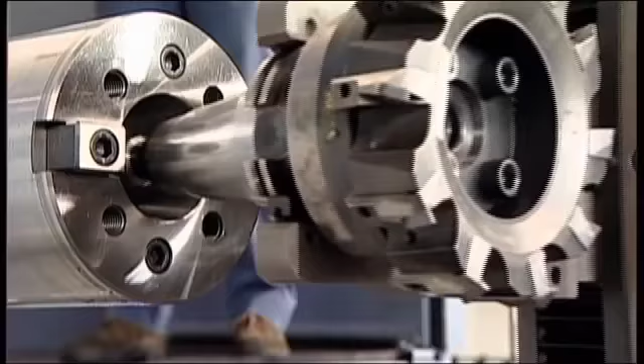In your manufacturing operation, you never rest, and neither does the competition. Your profitability is due in large part to the smart investments you make in converting raw material to finished product as efficiently as possible. And to do that, the machines you use must offer flexibility, creativity, and innovation.

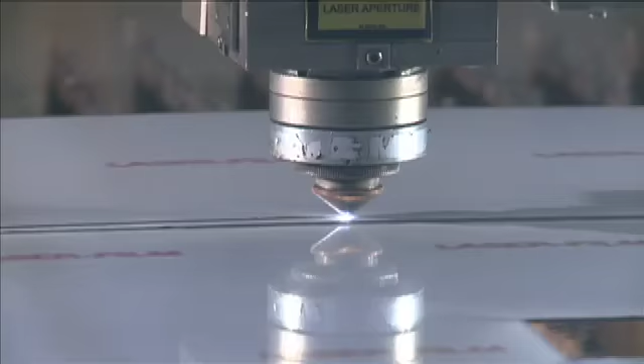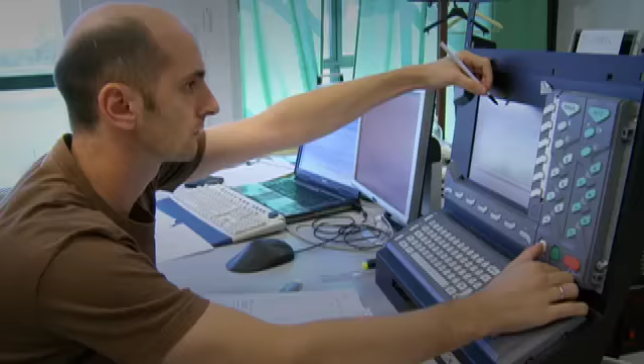Machines Italia is a project by the Italian Trade Commission that runs in collaboration with Federmacchine, which represents 14 industrial machinery manufacturers associations. Alfredo Mariotti, Secretary General of the organization, explains.

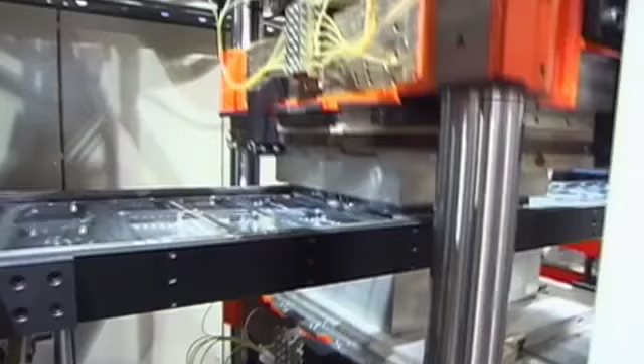Federmacchine is the umbrella organization for associations comprised of Italian companies that manufacture machinery - in other words, production machines used in various sectors of industry. Federmacchine, in addition to providing marketing and exporting assistance for their members, works in collaboration with the Italian Trade Commission to bring the best of Italian technology to machinery and technology expositions throughout the world.

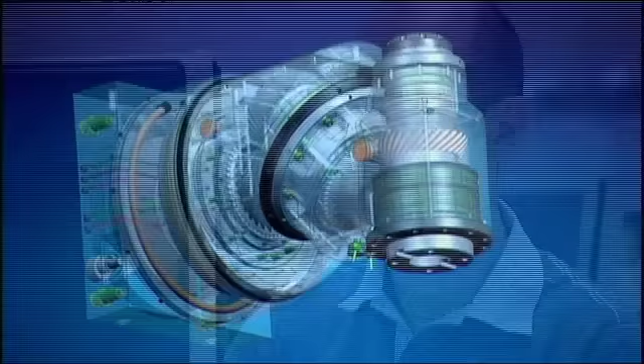We often say it is a machine or instrument that develops and that makes explicit human thought. And not just the expression of thought, but heart, soul, and beauty made manifest.

From the towering Air Force Memorial in Washington, D.C., to the architecture of Frank Gehry, Mariani Metal has found a niche in creating the impossible.

If an architect has a plan and they're unsure about it, if they take it to Mariani Metal, we can make it into a reality. And that's basically our philosophy, whether it be for an architectural job or something in terms of a structural nature for a building. We like to think that our range is very broad and there's no job that we can't take on.

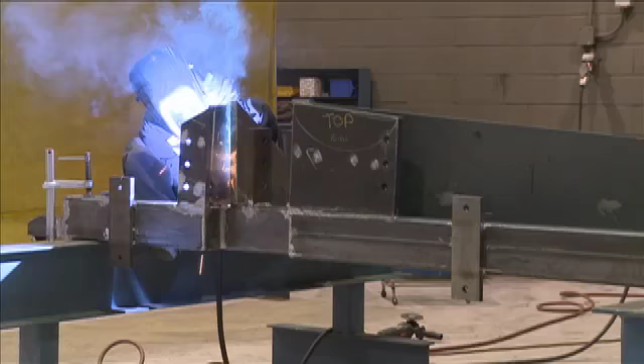When you are running a business, particularly in our business with construction where delays are very costly, your machinery has to work. And if you buy a machine that's of a lesser value, a cheaper grade in terms of quality, you're going to try to use the machine and the machine won't work, and that's going to cost you money and your customer money. So the Italian machinery, their benefit is that they work every time.

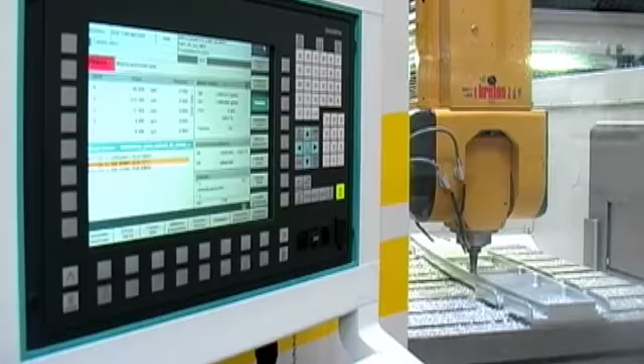The expression of one's craft is often external, but not always. For an automotive part maker, it's the innovation inside that counts.

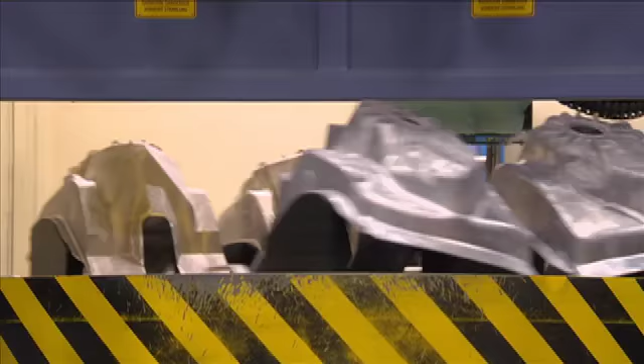Albany Chicago Company specializes in producing high-pressure aluminum die castings to very close tolerances. After winning a large contract with an automotive manufacturer, Albany Chicago had to find innovative solutions to meet their new clients' demands. We searched a wide spectrum of options to meet the needs for this particular automotive application, the shock towers. And there were not many companies that offered both an X-ray machine and an X-ray machine that had ADR.

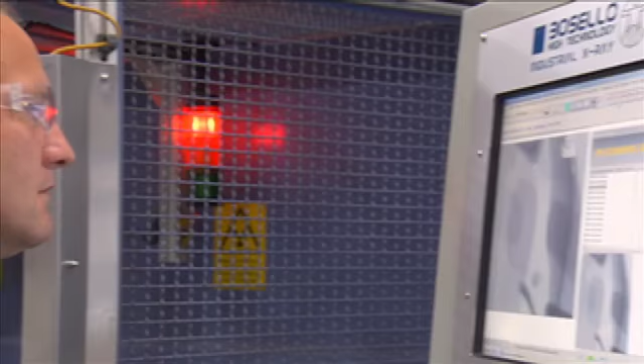ADR is automatic defect recognition, and we thought it was essential to have that ability. The Italian company, hands down, had the answer that fit this requirement. Bosello High Technology had what they needed.

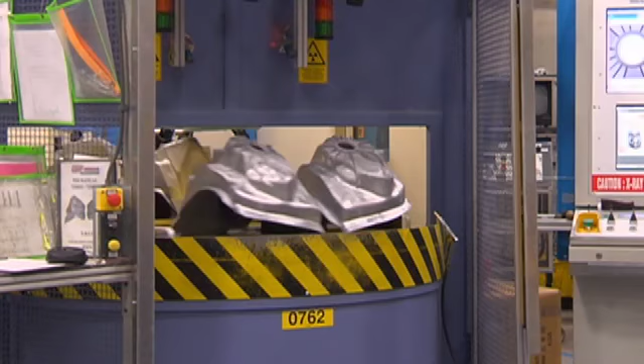As an Italian company that specializes in X-ray equipment, Bosello provided an industrial imaging unit with automatic defect detection, a faster process that reduces errors by automating a task that was previously done through manual interpretation.

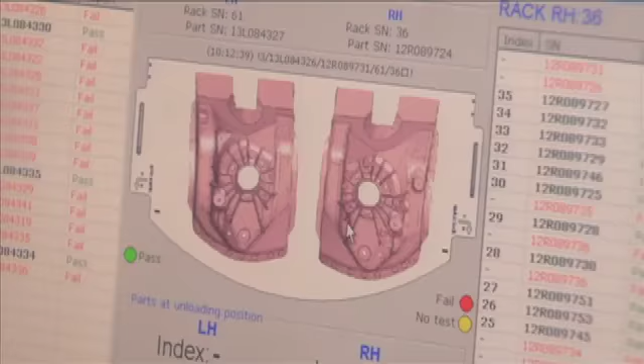The nice thing about the Bosello equipment, it doesn't reason. It's equipment. It doesn't care whether it's 5 minutes into the shift or 5 minutes towards the end of the shift. It's still going to mathematically evaluate potential defects against set criteria.

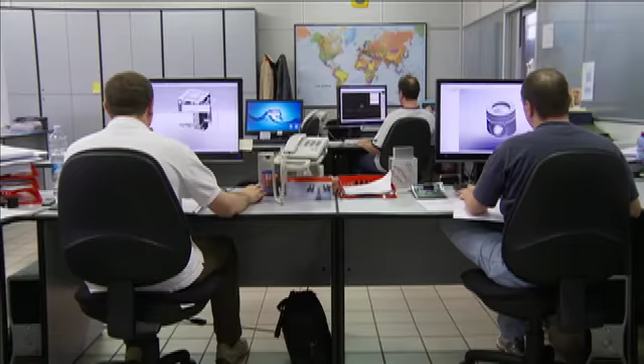When you have a passion in the company, every single simple machine is as important as a very big project you are developing. So I really need to know that customers are happy.

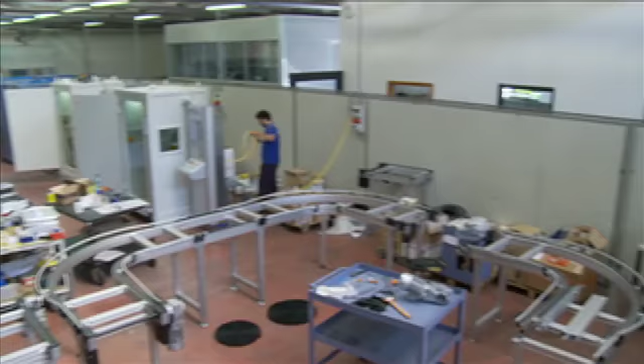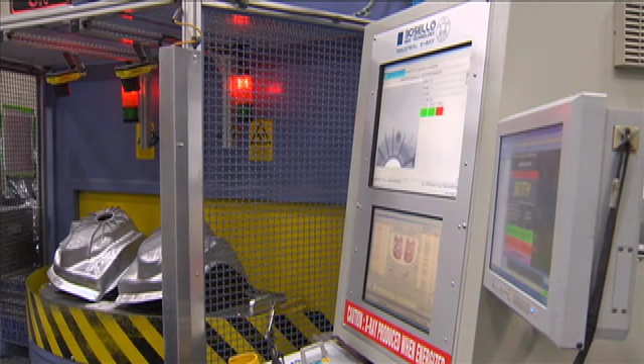I had preliminary conversations with Bosello, and in fact was very impressed with their understanding of what our needs were and how quickly they were able to address those needs and concerns. They're readily accessible on the telephone, via email, and physical presence in the United States.

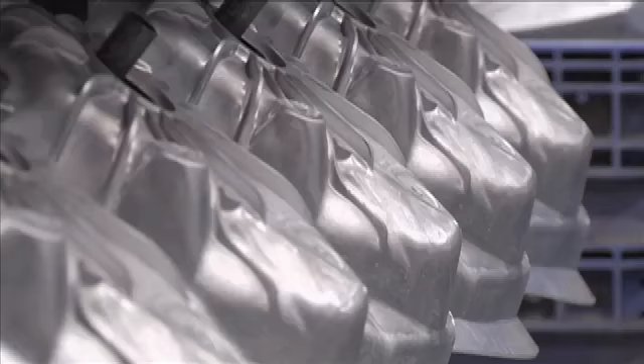They were very responsive. You know, the fact, hey, this is startup, they knew we were, shall we say, under the gun to make parts for our new customer. So they understood the urgency of that situation and were monitoring the situation very carefully.

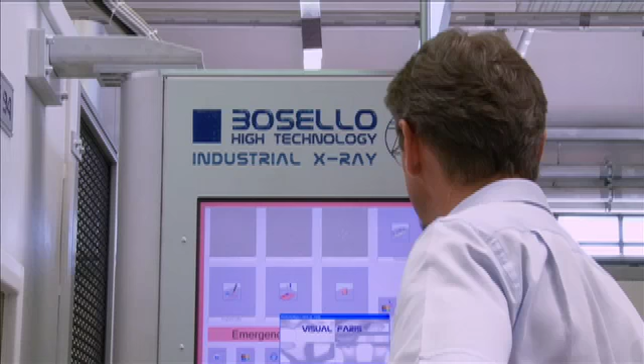Become a high volume company is not my goal. I'd like to be a very like an artisan, but with high technology.

The artisan can work in many media, applying high technology to industrial imaging or mechanized muscle to beautiful wood fabrication.

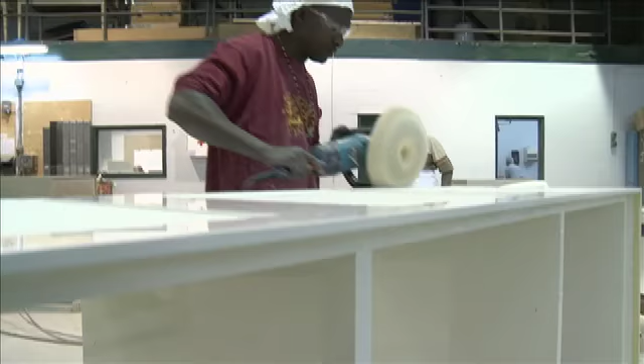Pinehurst was founded in 1967 by Bill Christie and Jim Christie, my father and my uncle. They began working in my dad's basement, and today we've grown to 150,000 square feet.

As one of the largest custom fabrication facilities in North America, Pinehurst Woodworking Company builds store fixtures and supplies shop fitting services to luxury retail.

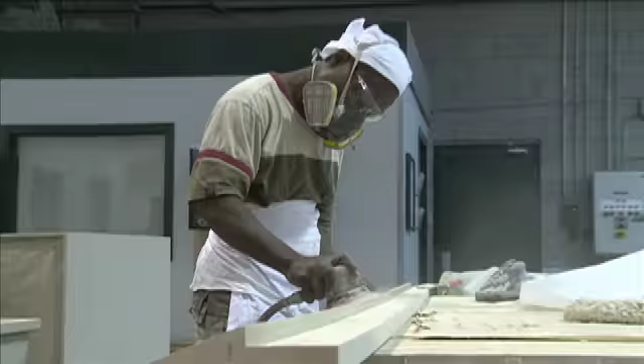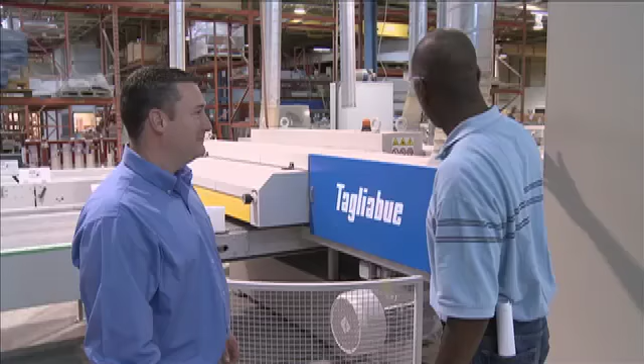Pinehurst prides itself in investing in equipment and technology to ensure there is no creative challenge that will exceed their manufacturing abilities. We look to Tagliabue to help us with setting up a finishing line, a sander, and a polishing system in order to be able to produce high-gloss finishes.

As family-owned companies, Pinehurst and Tagliabue share similar values.

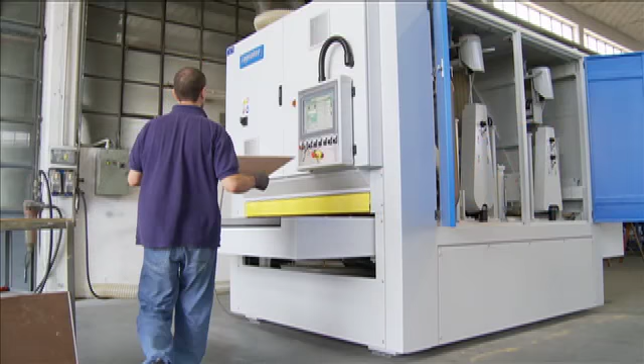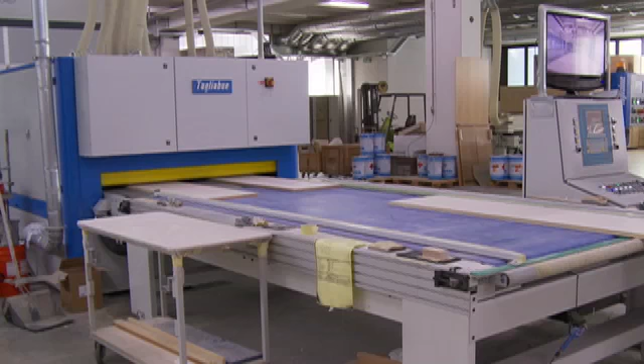For Tagliabue, their family name is on every machine. With that comes pride and the responsibility of making sure their products are always of the highest quality. Since we provide tailor-made machines for our customers, our project teams design a solution based on specific needs on a per-customer basis. We are responsible for the whole process from the beginning to the final product.

The key thing when we're looking for new equipment is really the ability of the salespeople of the company to be able to get involved in our process and really understand what it is that we're trying to accomplish. To come to our facility and understand how it is that we process things in order to make their machines work for us. I think it is in our DNA to be so much flexible and to satisfy our customers' requests.

We had the benefit of being introduced to Michael from Tagliabue. He actually came to our facility and he was kind enough to review our process and actually explained what we were doing and how we could improve it. It's known that the Italian machine producers, not only in the woodworking industry but also other industries, apply their machines very flexibly, very creatively and innovatively to the needs of the customer.

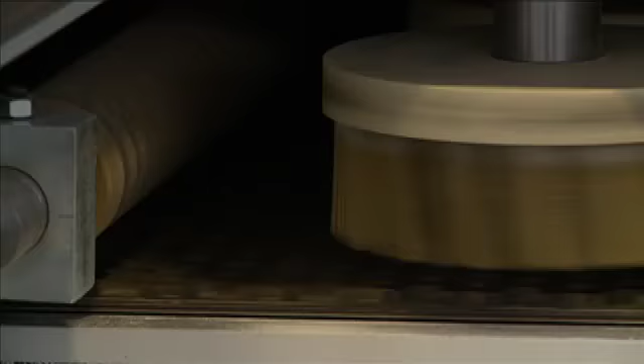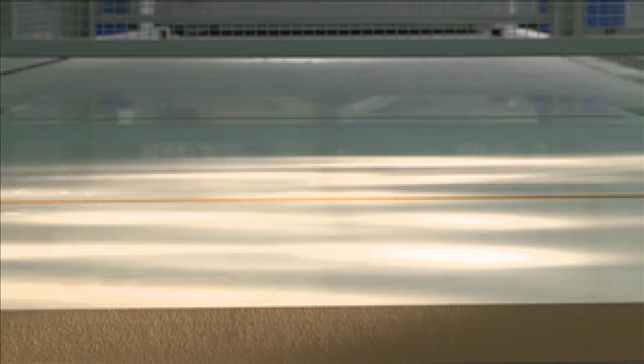The Italian machinery is really on the leading edge of millwork machinery. The finishing line, the sanding machine and the buffing machine have really dramatically increased our bottom line by reducing the amount of labor that we've had to put into producing the high gloss finishes. This is mainly a family company, so it seems natural to me, from what I learned from my father, to keep the quality as a top priority for us. They bring outstanding value to you with both customer service and the quality machine that they're building, and it really aligns with what we're doing here.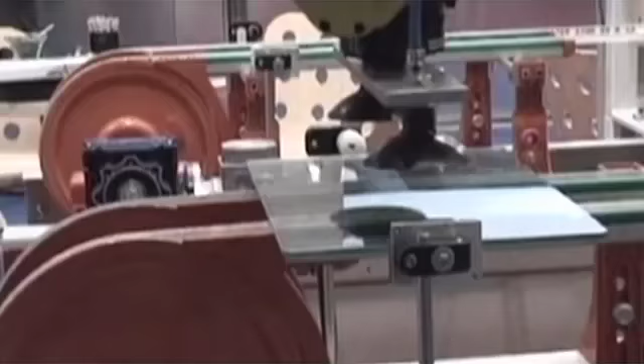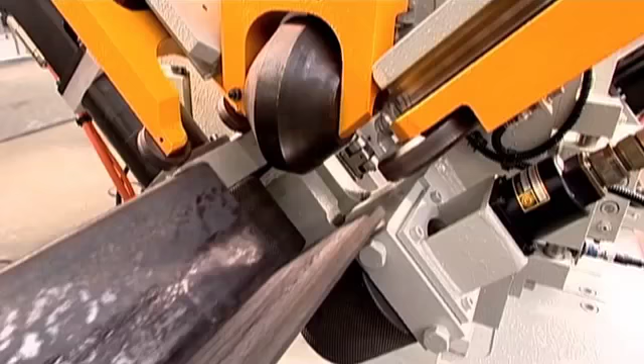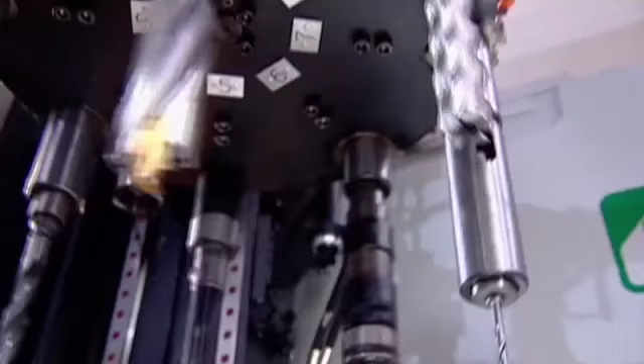When shared values of tradition and quality meet evolving innovation and technology, the results are powerful. Such alignment between customer and machine maker isn't unusual for Italian companies and their customers. Giancarlo Losma, president of Losma SPA, a leading manufacturer of filtration equipment to industry, explains. One thing that characterizes Italian machine tools is their continuing evolution. Our sector ranks among the best in the world. In order to maintain that position and improve on it, we need to be keenly aware that we need to continuously invest. That means investing in developing innovations and new technologies to improve our machinery.

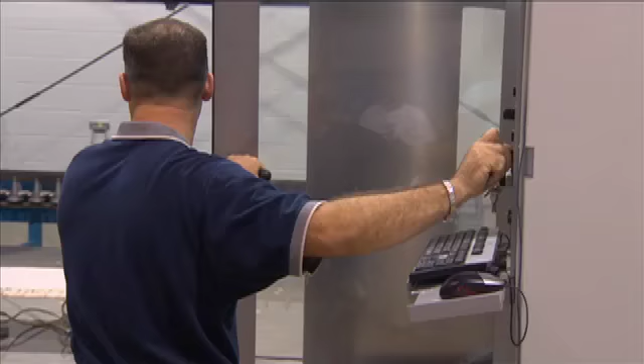CMS North America is a manufacturer of CNC machining centers for wood, advanced materials, plastics, stone, and glass. The name CMS stands for the construction of machines that are special. We have a high-level clientele who require high-tolerance machines. For example, Boeing, Lockheed Martin, and PPG Glass. The specialty of CMS is that we are not afraid to try anything unique. There is no such thing as a standard machine. If we have 10 different customers with a similar machine, they use them in 11 different ways. So the customization is the key for us, and OSAI actually allows us to do that. All our machines use OSAI controllers.

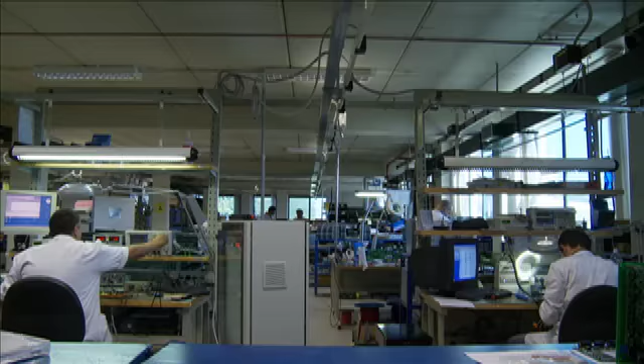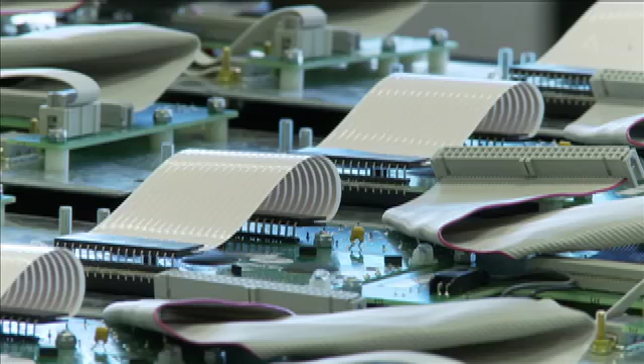OSAI, a part of Prima Electronics, is an Italian company that has been manufacturing CNC controls since 1957. The OSAI controllers are a perfect fit for companies like CMS that serve a wide range of industries. Their controllers are more flexible than the competition because they use standard software and off-the-shelf hardware that is easy to replace and customize. OSAI is the market leader in woodworking machining, in glass and stone working machines, and plastic working machines. And for these markets we supply our numerical control that can be applied to different machine tools. So our numerical control must be very flexible, must be easy to customize, and also easy to use.

It is very flexible. It allows us to do our own programming, add modules and write parametric programming and so on according to a specific customer request. The type of support that we receive from OSAI has greatly increased since 2001. At that time, OSAI actually put a building in the U.S. on the East Coast. The key values of our company can be described in a few words, starting from quality, technology, and the ability of the company to supply not only products but solutions for our customers, and the continued research of new developments and new enhancements for our products.

Well, what comes to mind when I think of Italian equipment is very high quality. I believe from an engineering standpoint, they're some of the best in the world. In Italy, what I have always appreciated was the fact that there is a genius in simplicity, and that's what they tend to bring to everything that they do. They don't overcomplicate it, but they give a wonderful, elegant solution.

They give a precision to their thought process, and at the end of it, the aesthetic and the capability of the machine fit very clearly together so that the customer actually sees something that he both desires and is drawn to at the end of it. From the flexible machine controlling solutions OSAI provides to the elegant solutions applied to fabricating sheet metal, Italian-made machines are known worldwide as among the finest.

Mott Manufacturing makes specialty laboratory furniture, including steel laboratory casework, fume hoods, stainless steel countertops, and a wide variety of flexible furniture systems. Our customers have a lot of special needs, and it's our job to be able to customize our product in order to meet those expectations.

Mott's commitment to quality and the use of state-of-the-art technology led them to purchase not one, but 4 Salvagnini metalworking machines. Since 1963, Salvagnini has remained at the cutting edge of flexible automation thanks to sheet metal processing machines that are capable of meeting the demands of every sector of sheet metal fabrication.

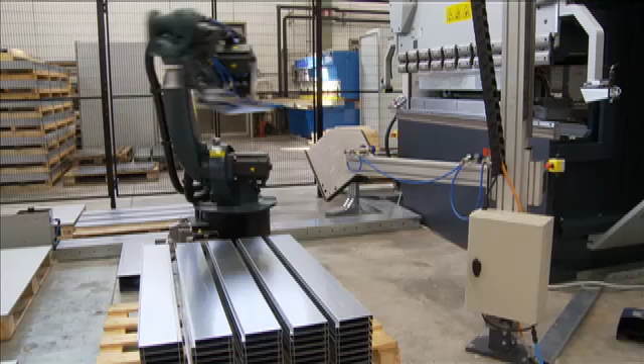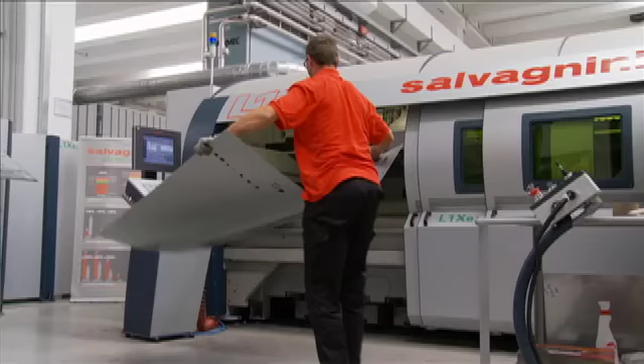This customer, he's very, very satisfied because he said, by producing his parts, his doors, on an automatic machine that has high enough degree of flexibility in order to produce all the doors he would like to produce, he gets a better return on investment, even considering the high investment of an automatic machine.

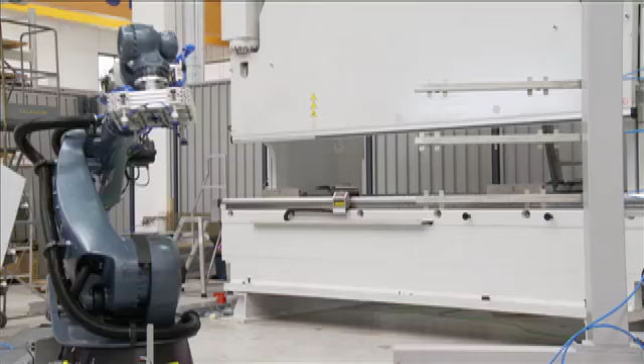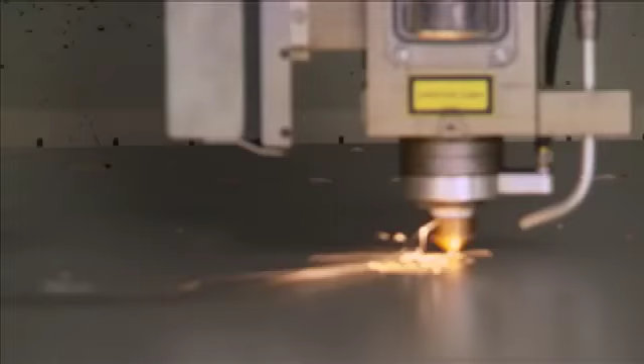Quality is paramount in our industry. We need to have consistent product coming off the production line. So it's important that we be able to make our product efficiently and with consistent quality. Quality needs to start from our approach to the customer, our understanding what the customer's needs are, our way of designing the machine, the way the machine is installed at the customer plant, and the way the machine is performing at the customer plant.

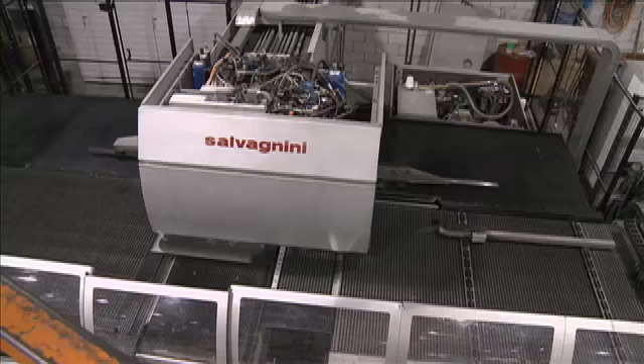When we moved into this facility 7 years ago, we didn't anticipate the amount of growth we were going to incur. So we started adding the Salvagninis in locations that we thought best suited our factory.

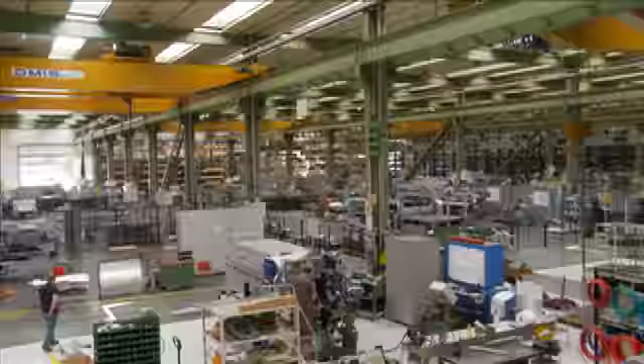We like to continue amazing our customers, and it's with the new solutions, with the new options we're bringing out on our machines. And it's pretty common to find someone that said after 1 year or even after 2 years of use of a machine he got, that he never thought that he could get so much out of this equipment.

The quality of the product that it produces consistently is key, and we've been able to achieve that with the Salvagninis. We've been able to achieve the labor efficiencies that we were hoping for, and we've also improved our material utilization, which was something we didn't anticipate going in, but turned out to be a bonus for us. We've been very happy with the first line, so after our first purchase, we made 3 additional purchases based on the relationship. They've been great to work with, and we're very happy.

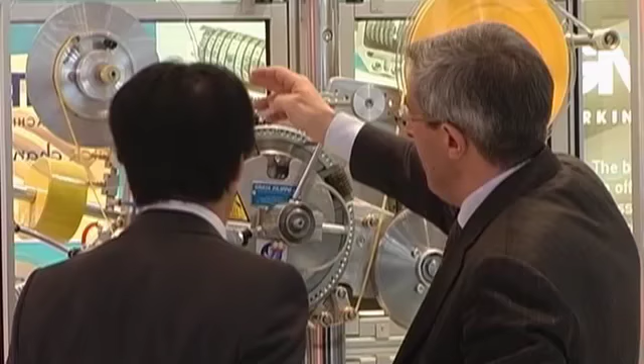There is an ongoing point to be made. Relationships matter. Se devo sottolineare poi un'altra caratteristica dei costruttori. I would like to point out another characteristic of Italian machinery manufacturers, a characteristic they share with the Italian population in general: the friendly rapport they establish with their customers.

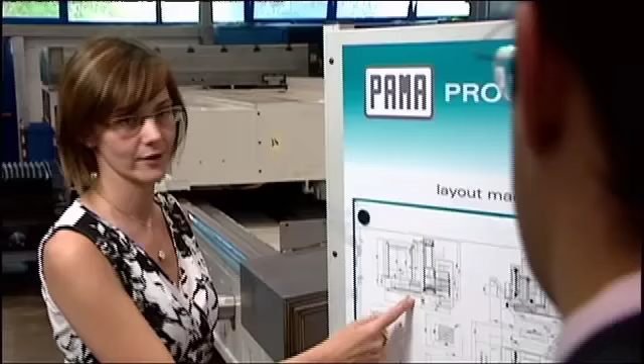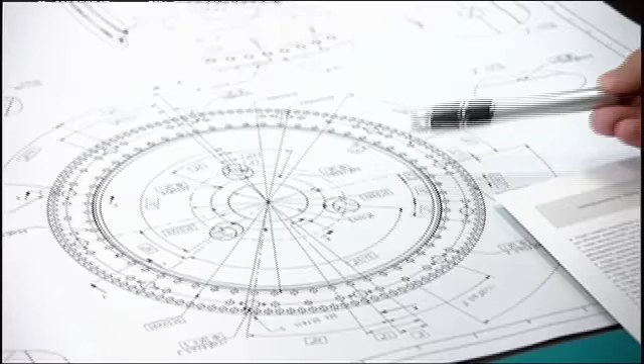Aside from partnerships that are typically created in any industrial or commercial activity, we succeed at building a friendly rapport with customers. This is one of the reasons why we are known as problem solvers, because we make the client's problems our own. We strive to resolve them in any way possible, precisely because we have established a bond of friendship. A customer-vendor relationship built on trust and friendship was the basis for this builder of engines to make a fundamental technology shift that led to a remarkable transformation.

In business since 1870, Fairbanks Morse is the largest medium-speed diesel engine builder in North America. With engines weighing up to 370,000 pounds, Fairbanks services the United States Navy, municipalities, and hospitals. Fairbanks considers themselves the best engine builder in the world, and you will find that the employees here are very proud of that fact, that they build very, very good quality equipment.

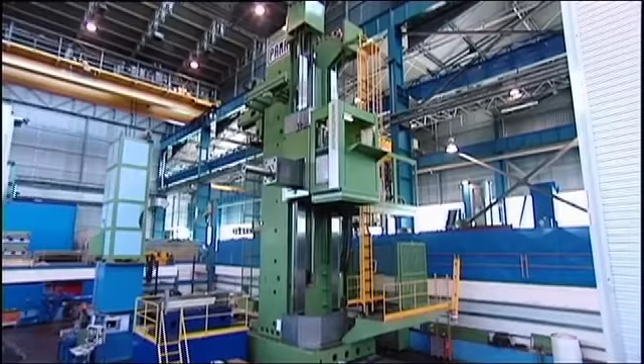A relationship with Fairbanks started, for me personally, about 6 years ago, and they were in need of a machine with quick delivery, and we happened to have that machine available. Sergio Scotti is with Pama, one of the largest machine tool companies in Italy. They specialize in horizontal boring mills and recently began building vertical gantries. Sergio and I hit it off right away because he was a maintenance person before he became a salesperson, so our ability to communicate on technical issues was very good.

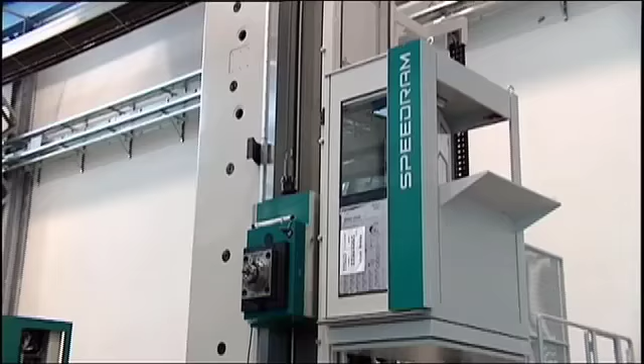That was a huge advantage for both of us to get this project going. What we wanted was a machine that was reliable, but the main thing we were looking at is being able to improve our uptime, increase the delivery of our product to our customer in a more timely manner.

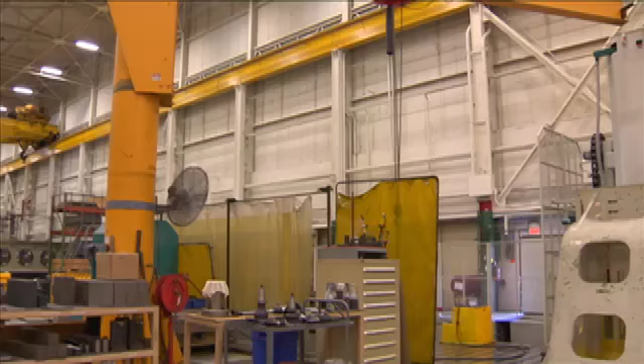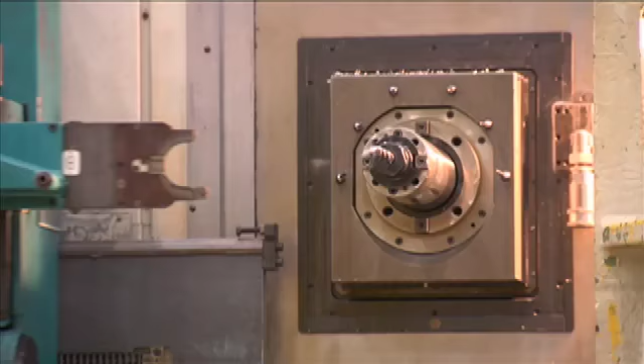The machine that they purchased is a Speedram 1000, which is a floor-type horizontal boring mill. And the machine was purchased to be used to machine their engine blocks. They were able to tailor to our needs attachments that would go inside the block and do features that you couldn't get to with normal attachments or a standard offering. So that was a big plus for them, and they seemed to have an attitude of want to do that kind of work. You don't always get that from a lot of manufacturing and machine tool builders.

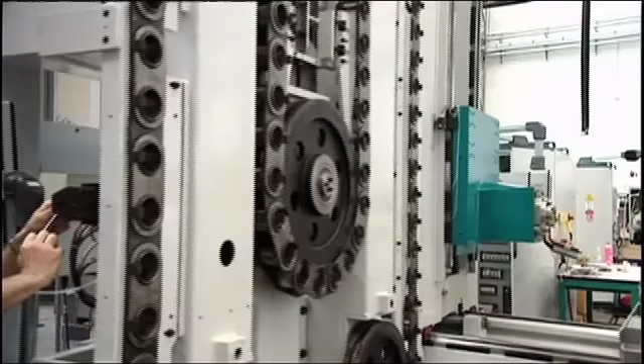In addition to that, we also prepared for them the whole process, turnkey application. I guess that was probably what made them trust us, since we said yes, we can do it, and we will do it from A to Z.

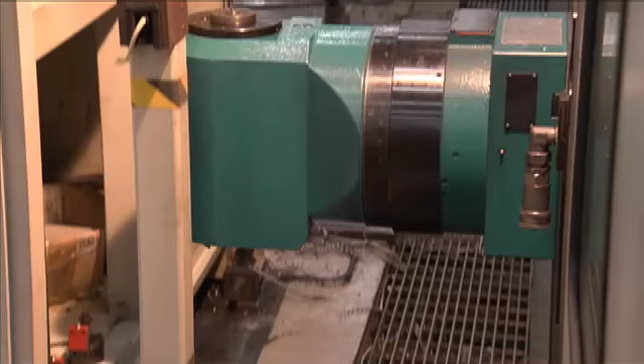Pama has shown that they have the fortitude and the knowledge of their equipment to help us maintain a good piece of equipment, works with our maintenance people well, has good delivery of component parts that keep our uptime of our machine going well. And we were able to take advantage of tooling, newer tooling, latest technology tooling, in order to move faster and help us get our production through and out to our customers. That was a huge step. It's a big paradigm shift for our organization as a group of people even.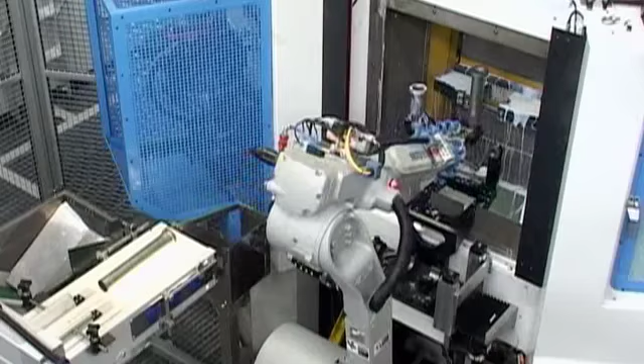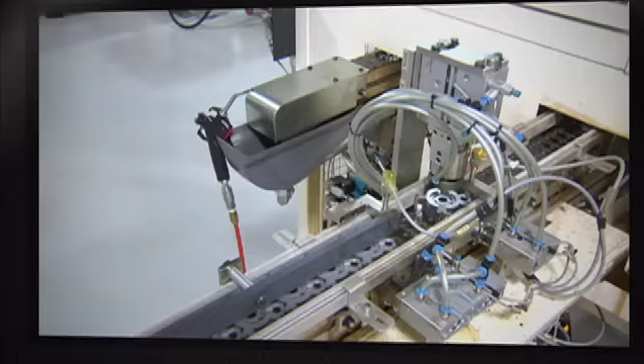A company's approach to its core business can be completely changed through innovation. In the North American auto industry, Italian innovation drives efficiency and delivers a big return on investment. General Motors Components Holdings is a 1.7 million square foot facility that supplies engine components for the automotive industry. Their challenge: to manufacture a new product that requires the grinding of multiple surfaces. Based on their original process, it looked like it was going to require multiple machines to meet these new requirements.

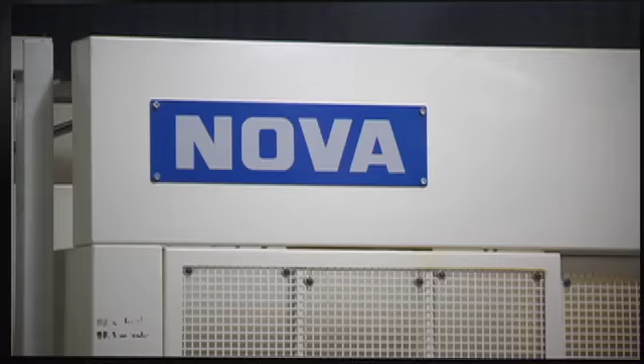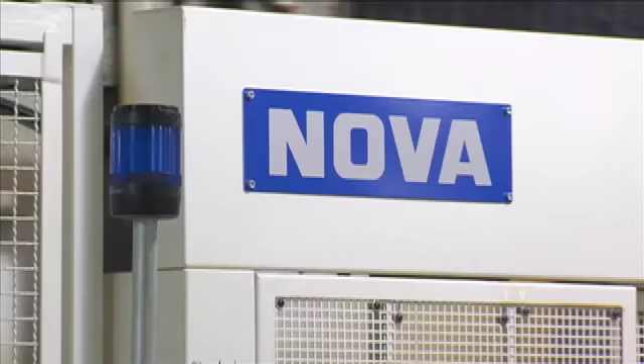We work very closely with our customers to make sure that we, together as partners, bring them the process that they need in the end. David Bellotti works in the North American office of Meccanica Nova, an Italian company that specializes in grinding machines. Working with the engineers and the technical people at Meccanica Nova, we were able to develop a single machine that was able to save a substantial amount of money and actually produce a higher quality part.

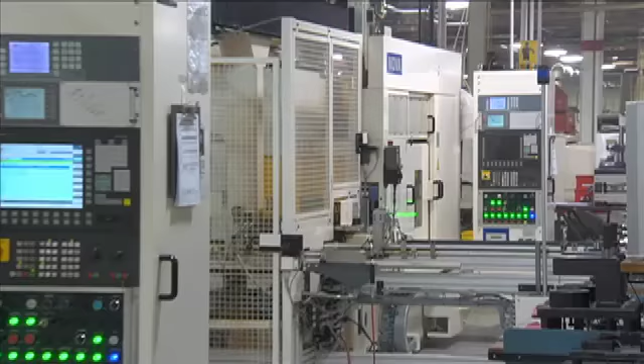In the case of GM, they came over to Italy to work with us on that, and we have what we call a design review, where we go over the entire intent of the project, not only from the machine's build aspect, the accessories included, but also the approach to the process that we originally all had agreed on. So it was actually a collaboration. They listened to what we needed, gave input, and then we worked together at developing solutions.

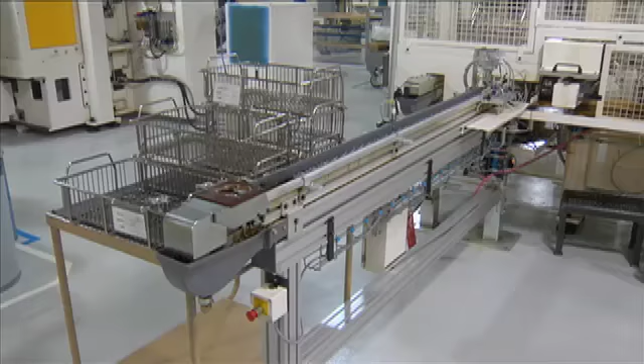Uptime is critical. Throughput is critical. If you can produce the most amount of parts at the end of the day, and those are saleable, good parts that are ready to go into assembly, that's what it's all about. The good part was the machines hit the floor. We started making parts, which is not always the case with a lot of new pieces of equipment. So already very positive feedback from the leadership within the company.

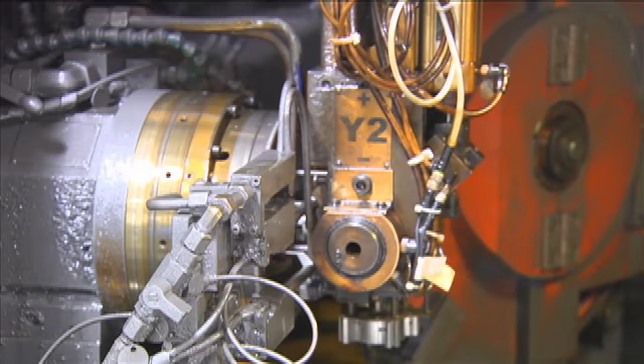We've improved cycle time on the machines. These machines today are running at 97% uptime. I don't have to say anything more. We're talking about machines that perform week in and week out. Italians are very proud people and take their work personally. So whether you're turning a screw, putting on paint, or finalizing the pneumatics, or whatever it is that your job may be, they take it personally, and there's a lot of pride in Italian products.

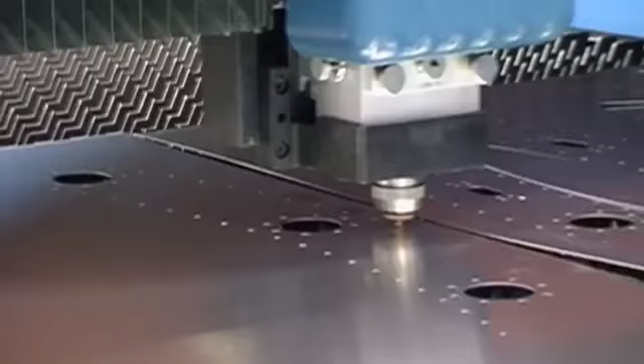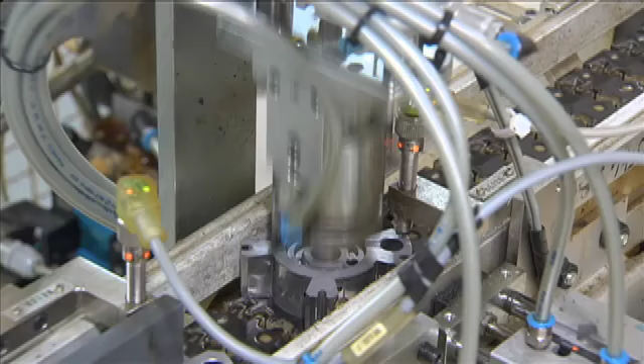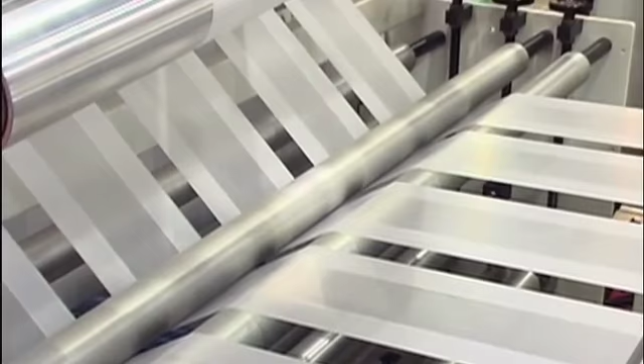Success built on strong relationships, trust born of unrivaled performance, creativity, innovation, and flexibility delivered many times over every day. It's the Italian way. Italians are very skilled at providing personalized solutions, which I call personalized quality. We solve a client's problems. We listen to our clients and then offer the best solutions to their problems.

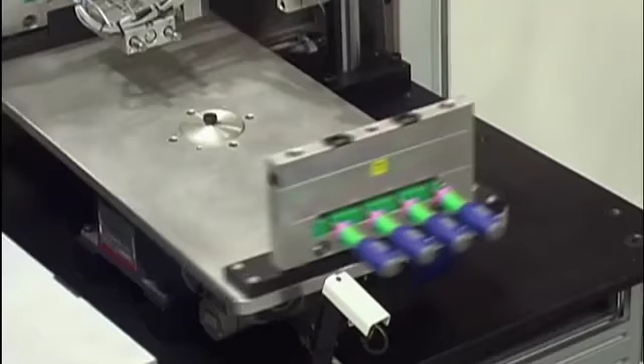They are committed to improving their ability to help customers in the early stages of a project by strengthening the customer-vendor partnership from the inception of a project, creating machinery that helps the customer solve problems, and following up with that customer post-sale. This in turn permits customers to turn around and create excellent products that allow them to compete in the global marketplace using superlative made-in-Italy machinery. If you don't use excellent machinery, you can't make excellent products. Machines Italia, turning flexibility, creativity, and innovation into productivity.